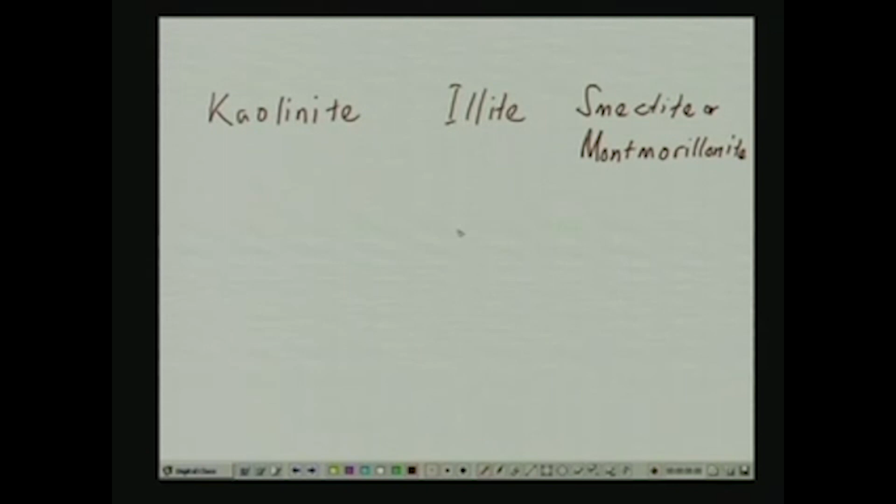If you consider this series here, we looked at some of the chemical processes involved in the tertiary weathering of these three most common clay minerals, and what we found is that under certain conditions smectite mineral actually converts into illite or kaolinite. So from that discussion it appeared that the weathering susceptibility of smectite is much higher in comparison with kaolinite and illite.

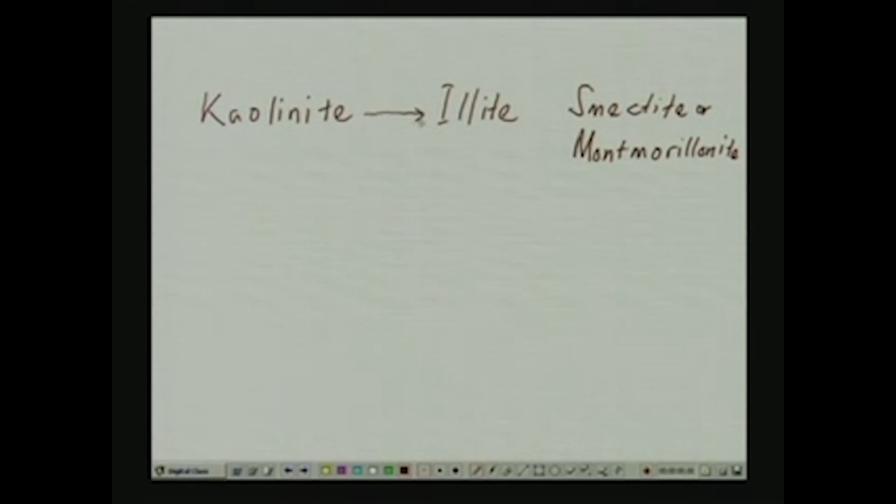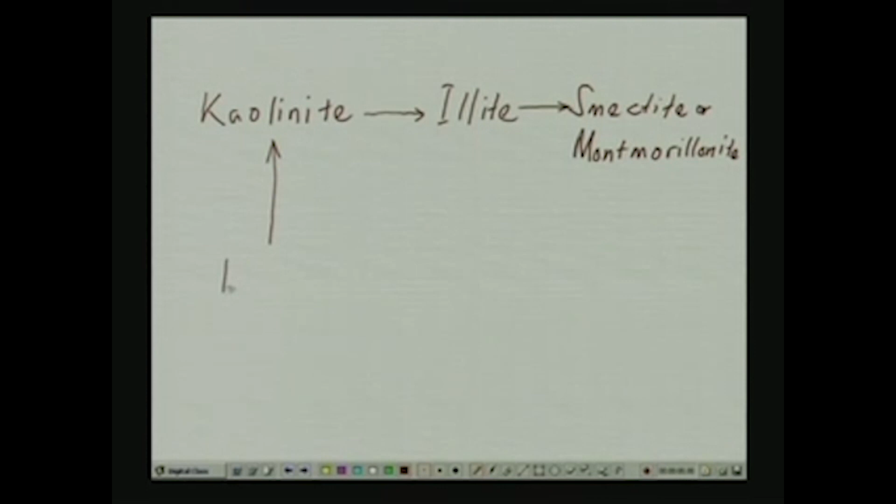In fact, kaolinite mineral is perhaps the most stable under ambient conditions, and that is followed by illite, and smectite is the least stable of all three most abundant clay minerals. So kaolinite is least susceptible to chemical weathering, whereas smectite or montmorillonite has got the highest susceptibility to chemical weathering.

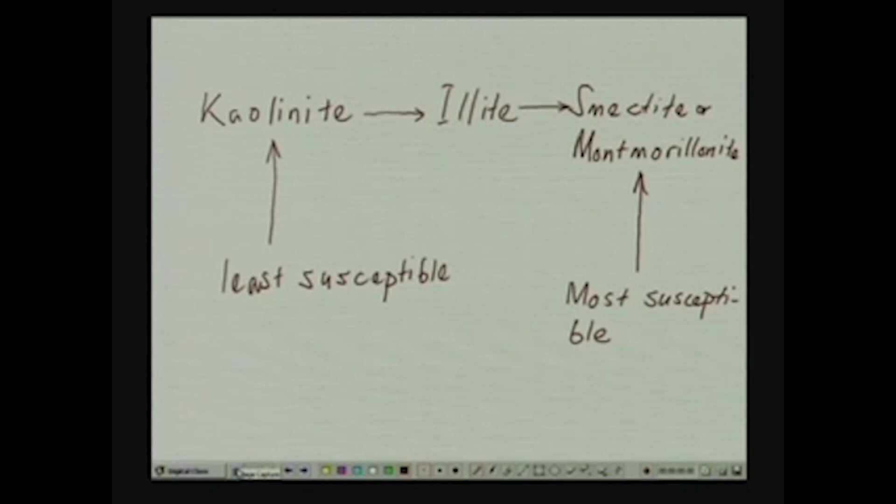Okay, so that actually takes care of the first question. Now the second question that I asked was which clay minerals form from chemical weathering of feldspar, and we discussed these things in the course of the last couple of presentations at length, particularly for orthoclase or the potassium feldspar.

What we indicated during those discussions is that under acidic conditions in presence of water, orthoclase mineral gets hydrolyzed, and that leads to the formation of kaolinite clay mineral, and that in turn, the kaolinite clay mineral can get leached and lead to the formation of gibbsite or bauxite ore.

Now a very similar chemical process is also there that leads to the weathering of sodium feldspar. So the sodium feldspar also gets converted into kaolinite mineral, and other weathering products such as release of alkali ions and generation of silicic acid. So that, in a nutshell, is the chemical weathering process of feldspar minerals.

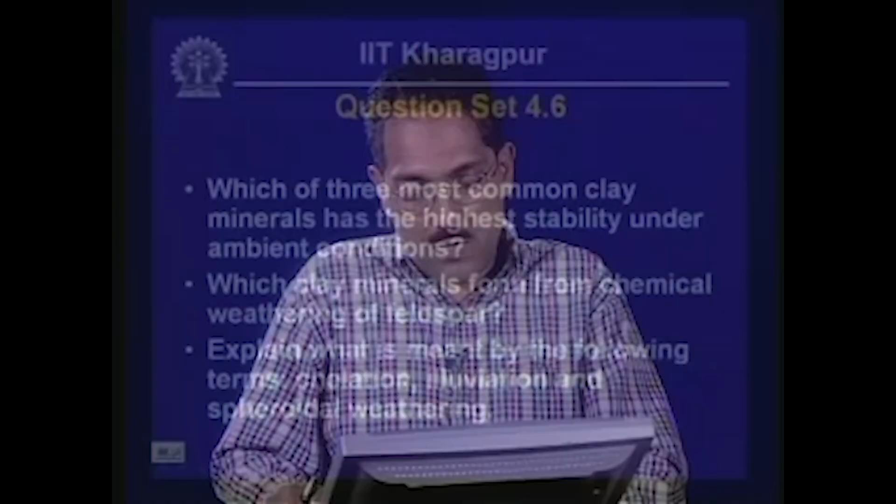This process has got importance not only in chemical weathering, but it is also commercially exploited in removal of several metal ions from different environments. Then the second term that I asked you to explain was illuviation, and to explain this, we have to look at a stratified deposit.

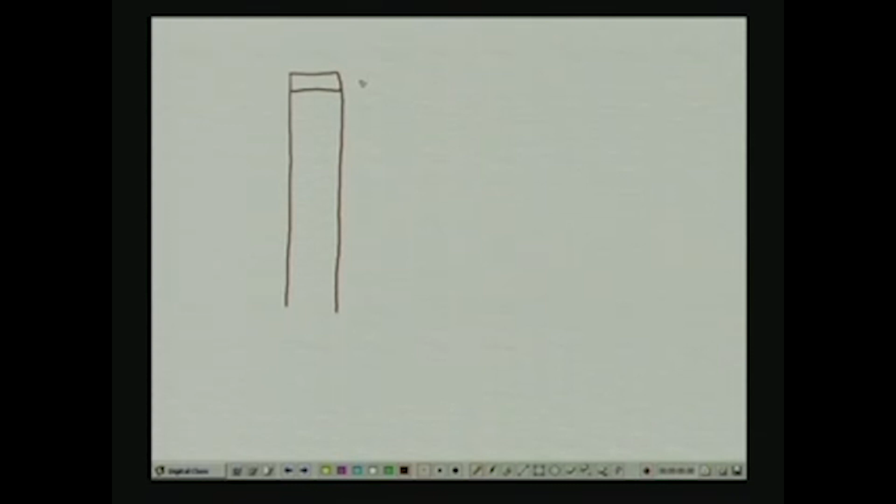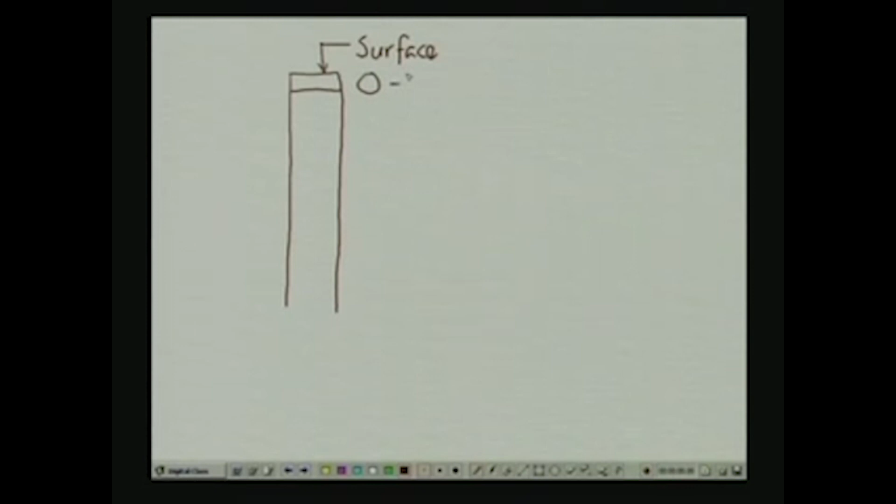Let's consider the residual soil deposit that we talked about in the previous lesson. In that particular stratified deposit you had an O horizon near the surface. So this one here is the surface, and then you have the O horizon that is full of organic materials, partly decomposed, such as partly decomposed leaves or animal remains and so on and so forth.

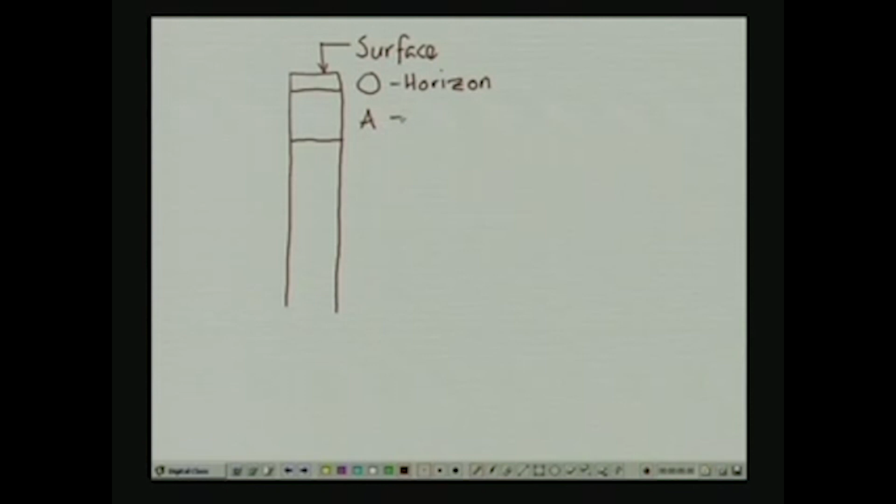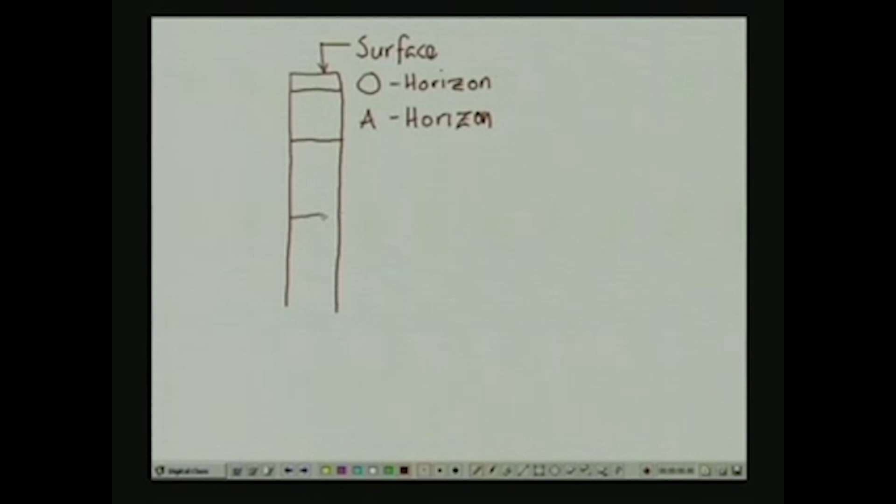And underneath the O horizon, typically we had the A horizon, and the A horizon, I stated, is rich in minerals, but it has got some organic compounds in it too. Underneath the A horizon there is a B horizon, and underneath the B horizon there is a C horizon, which includes partly decomposed bedrock or unweathered rock.

As indicated in the previous lesson, this kind of stratified deposit develops after chemical and physical weathering of the bedrock in situ, without any transportation process, over a very long time. If there is less time available for weathering, these distinct horizons do not develop. But here we are considering a mature stratified deposit of residual soil, like the one shown here.

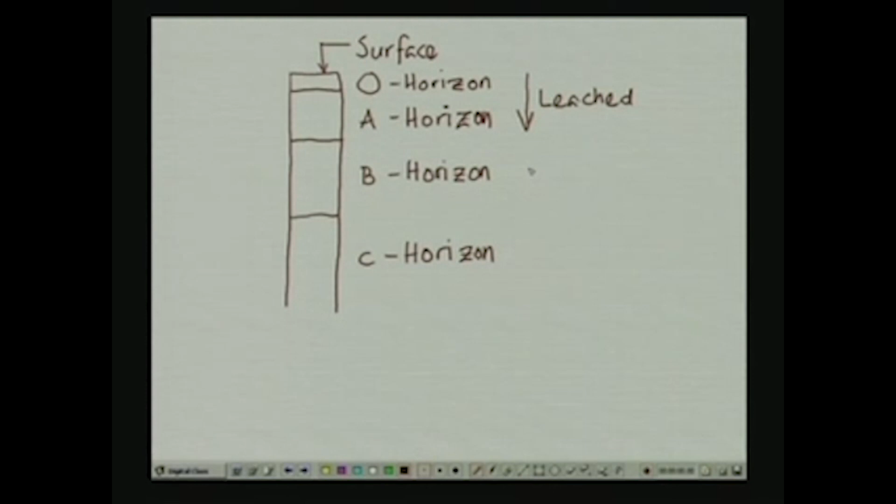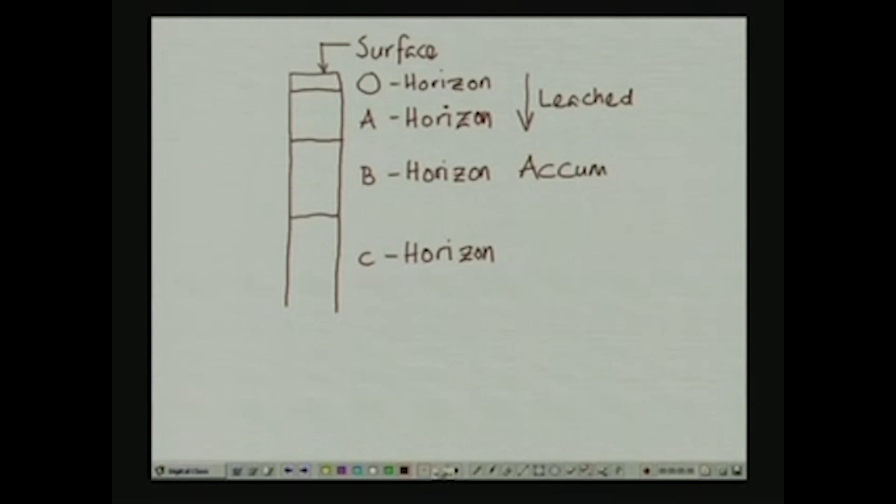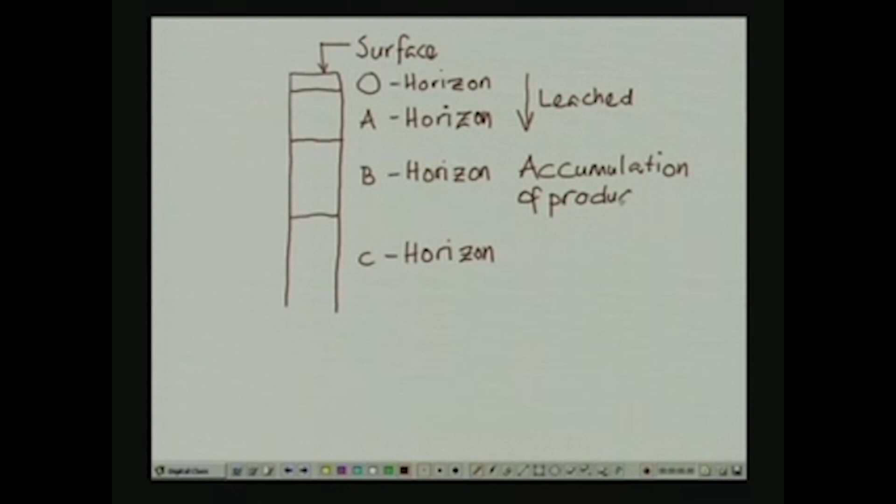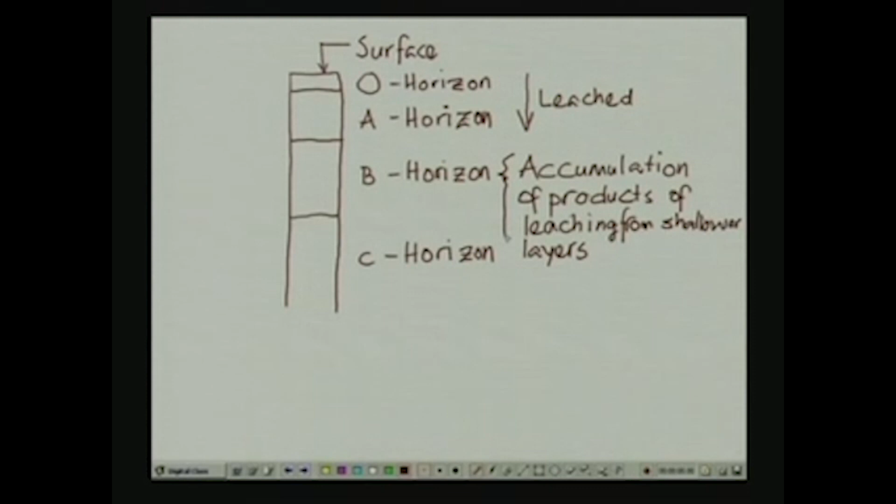In environments exposed to high levels of precipitation, such as rainfall and snowfall, chemicals from the O horizon and A horizon get leached out, and the products of leaching accumulate underneath within deeper layers. This accumulation of chemical products of leaching from shallower layers is typical of the B horizon, and this process gives rise to illuviating and eluviating horizons.

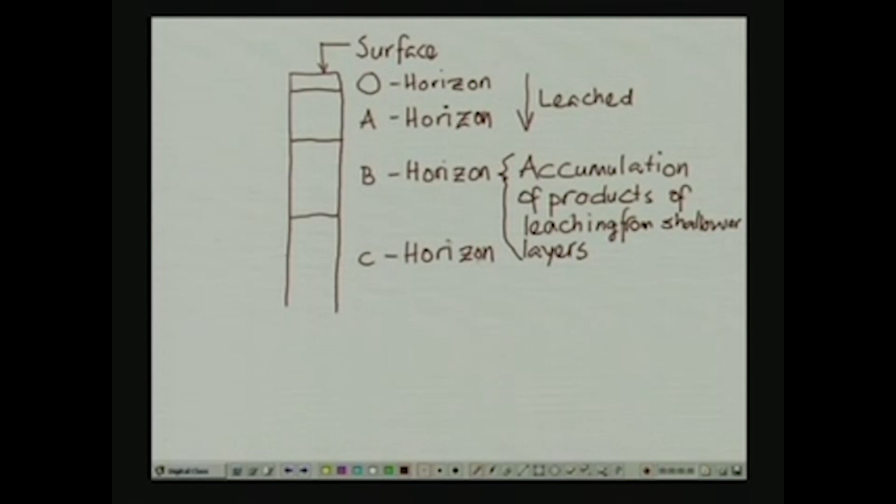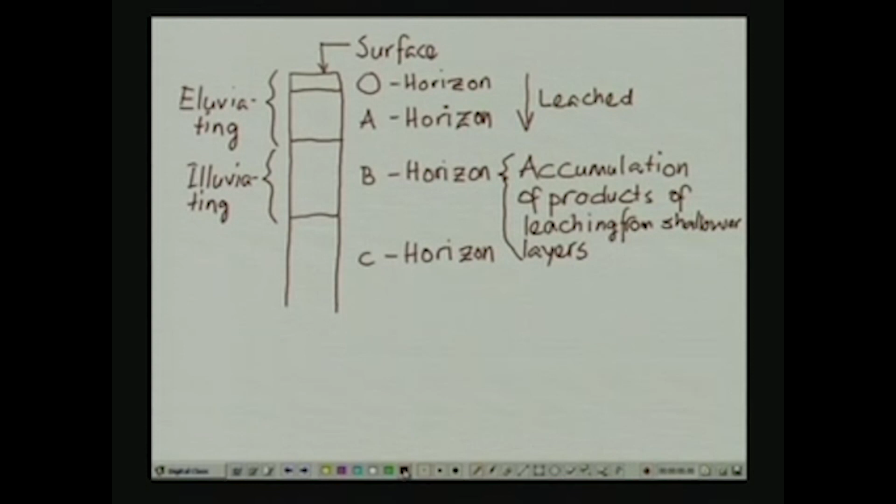These two are essentially eluviating horizons, meaning they are losing minerals, and this one here is an illuviating horizon, which accumulates products of chemical weathering from shallower layers. That explains the terms illuviation as well as eluviation, although the question did not ask for the explanation of eluviation.

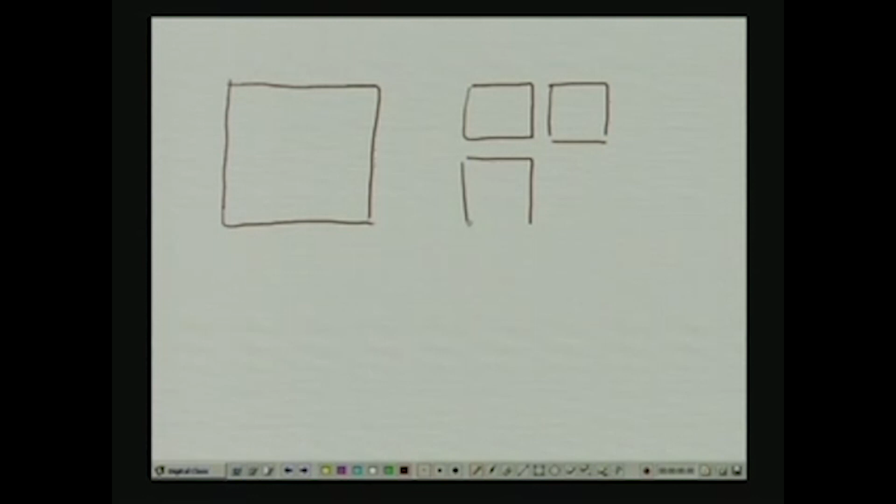Now the third question I asked was about spheroidal weathering. What I explained previously is that physical weathering involves breaking larger pieces of rock into smaller pieces such as these. Near the corners, the amount of surface area exposed to weathering agents is much larger in comparison with the volume it represents. As a result, weathering is much faster near these corners compared with flatter areas.

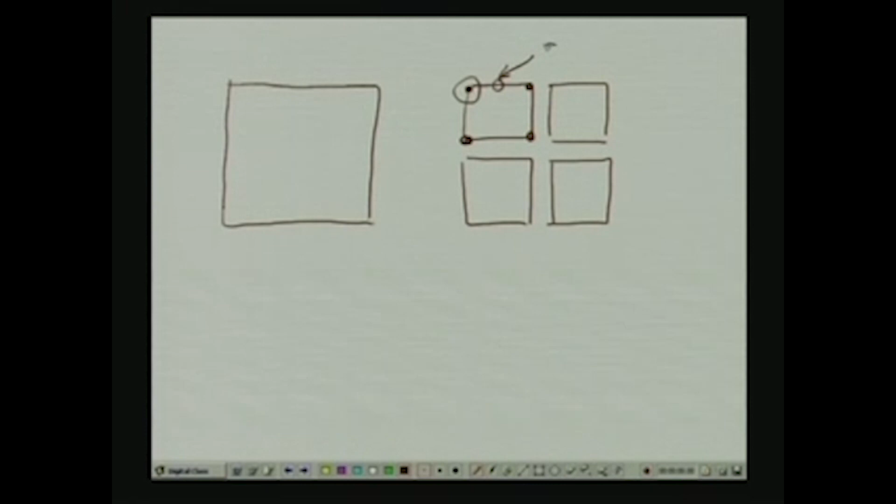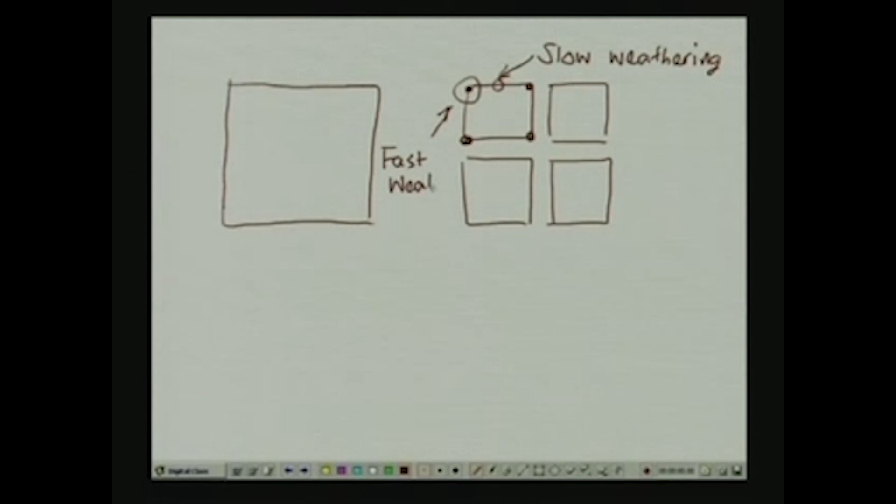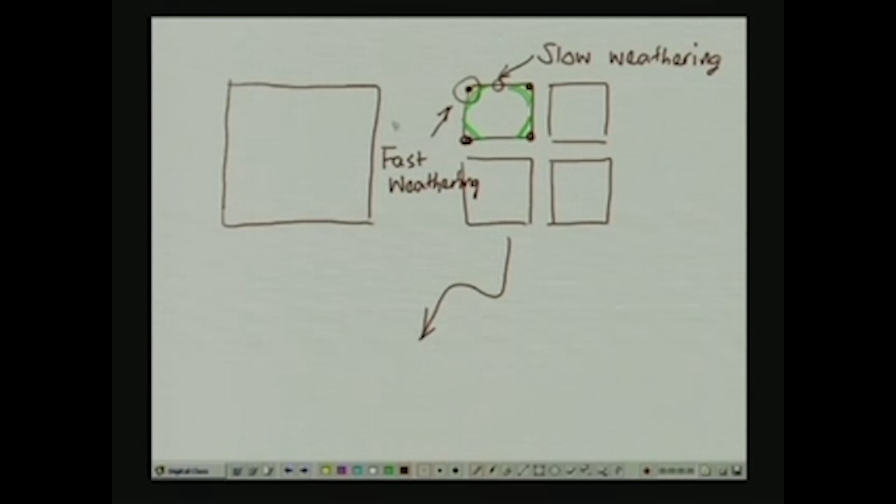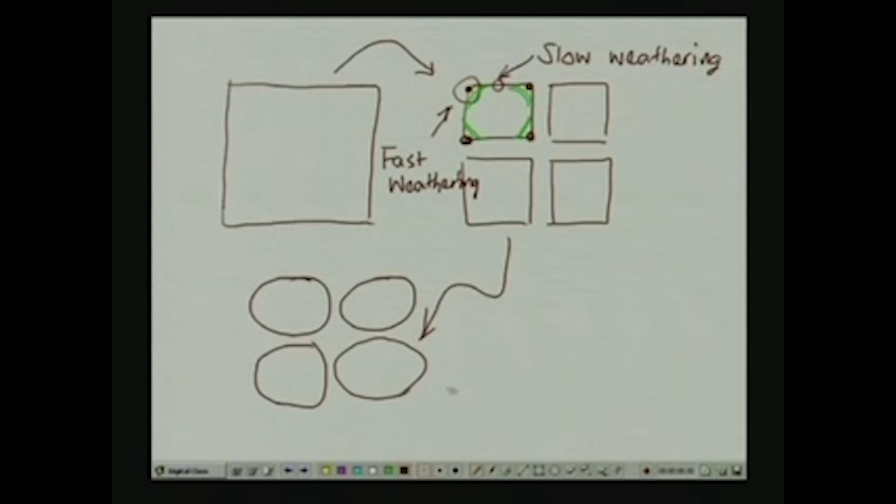So here you will have slow weathering typically, whereas near the corners you will have fast weathering, and this process leads to gradual rounding off of the corners of these pieces of rock. Finally, what you end up with is a situation where you are left with a bunch of rounded pieces of rock, and this particular type of weathering is called spheroidal weathering.

Okay, so that takes care of the question set that was given to you in the previous presentation.

Now we move on to the subject matter of this topic. What we want to learn in this lesson are the factors affecting sediment transport. We will be able to list the major erosional and depositional features that arise because of flowing water, wind, and ice, and we will see the grain size characteristics of the deposits that form during these transportation processes.

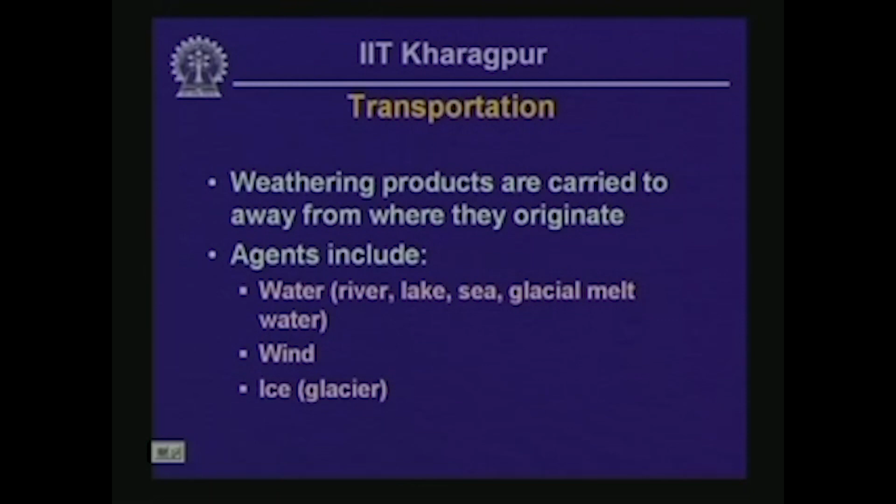First, the question that comes to mind is: what is meant by transportation? The products of physical and chemical weathering get transported away from the location where they were originally formed, and they get deposited at great distances from the location where they originated. This process is called transportation.

Transportation of sediments can be triggered by several different agents. The main ones are flowing water—which could be a flowing river, ocean waves, submarine currents, or meltwater streams from glaciers—as well as wind, or ice itself. These are the main agents that trigger the transportation process, and we will consider each one in some detail in this lesson.

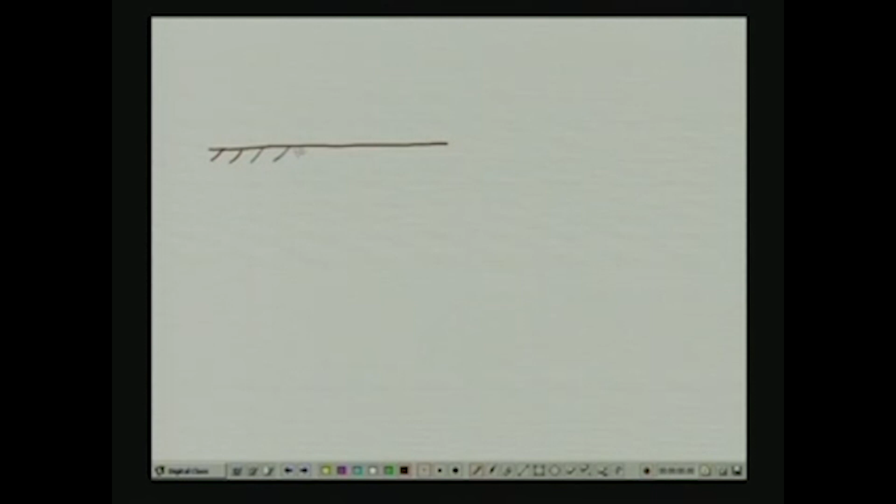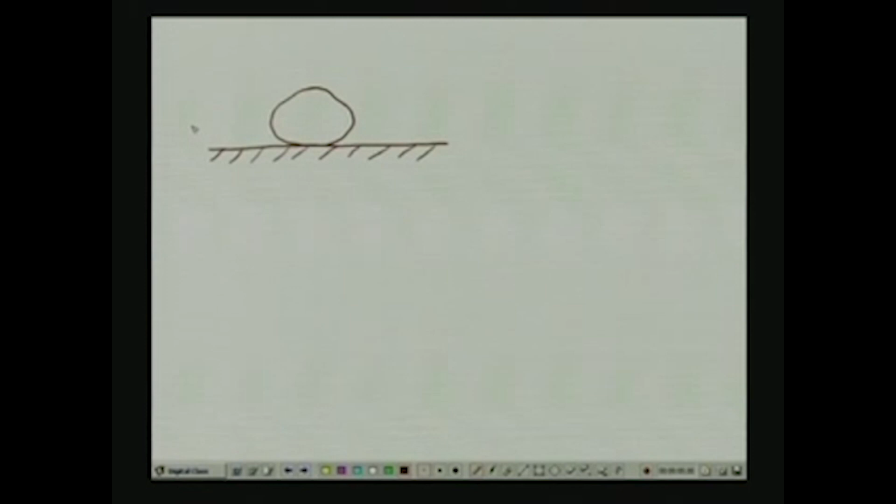To understand the transportation process, we need to understand the action of fluids which triggers sediment transport. The physical processes involved in fluid action include the development of lift and drag. Consider that near the surface of the earth you have pieces of rock or clasts, and water or wind flowing around these pieces, and the streamlines that develop in this process are of this type.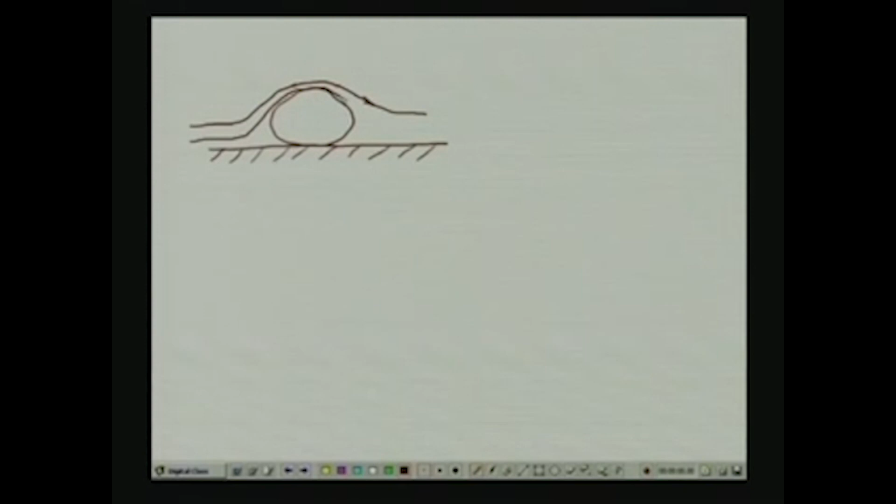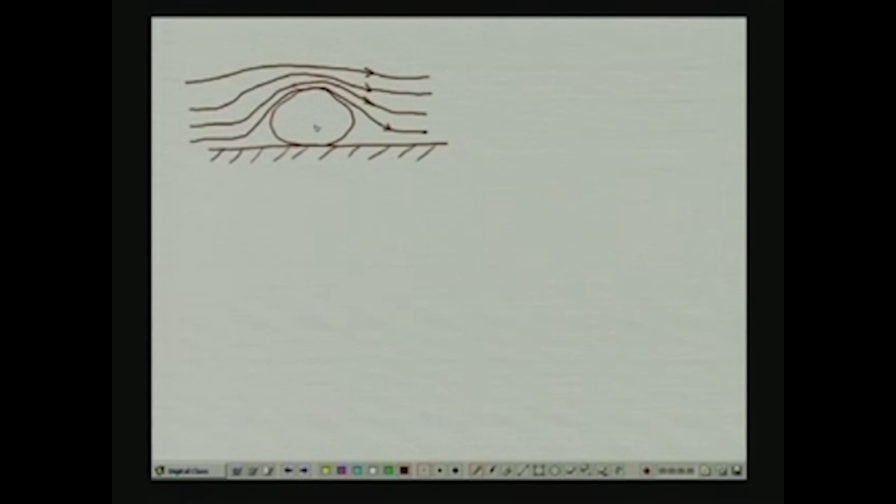What happens typically is that the streamlines get squeezed close together near the top of the clast that it is passing by. Because of that, a pressure drop develops near the top of this clast, and consequently the clast feels an upward force—this type of force is called lift.

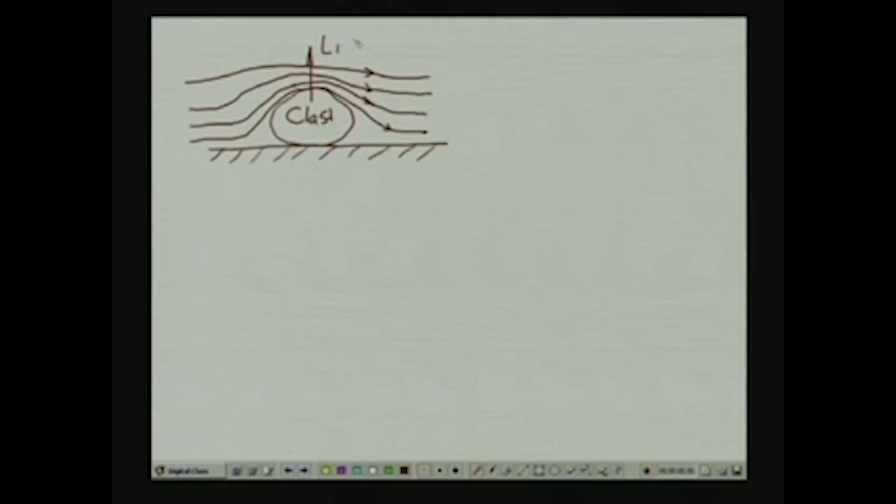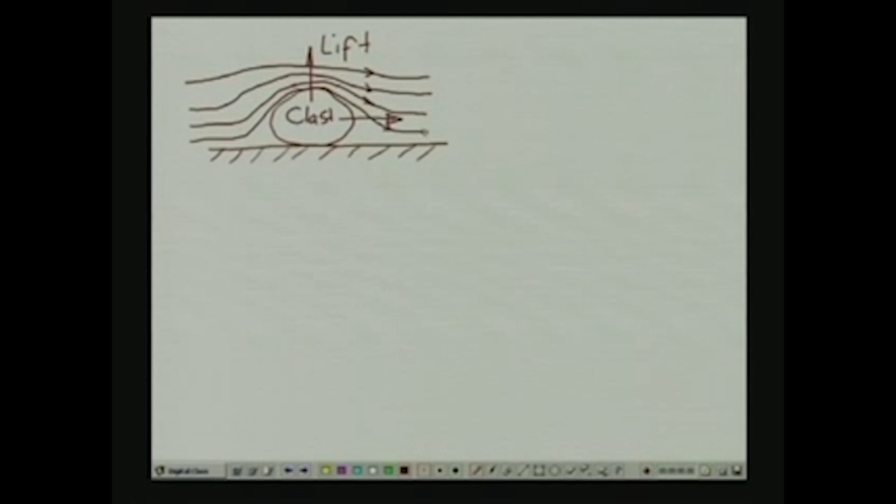This is actually exactly the same kind of process which gives rise to the lift above airfoils or the wings of an aircraft. It is exactly the same kind of process, and there is also a pressure drop near the front of this type of configuration of this flow regime, and as a result the clast also feels a force in the forward direction, and that type of force is called drag.

So the clast gets dragged in the direction of flow. In this case the direction of flow is oriented like this, so this is our flow direction. The clast is going to feel a drag along the direction of the flow, and also it is going to feel a lift.

A lift above, perpendicular lift in the vertical direction, because of the close packing of the streamlines near the top of the clast.

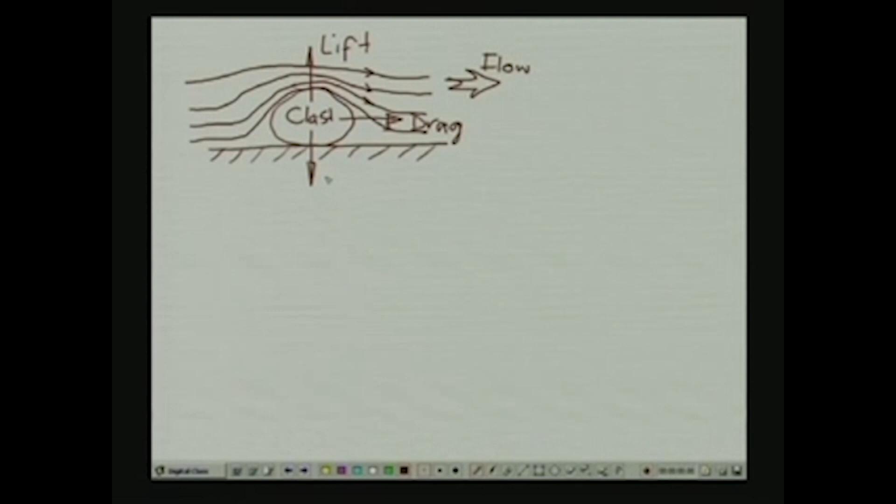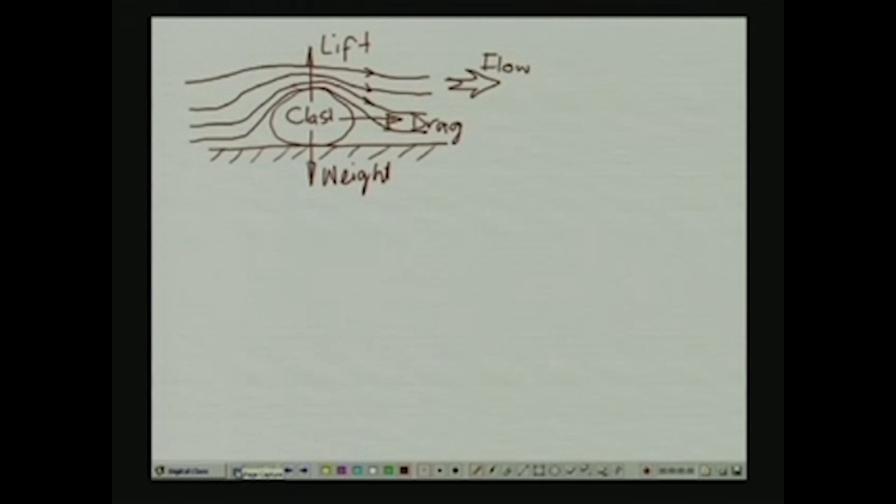In addition to that, the clast is also going to have its own weight. So the weight of the clast is going to be counteracted by lift, and if lift becomes larger than the weight, the particle is going to become entrapped or entrained within the fluid flow.

The first one, on the left, is called the Shields parameter, in which you have got a quantity called tau naught in the numerator, and this particular quantity depends on the characteristics of packing, in other words how closely packed are individual grains near the location where the transportation process is being triggered.

It also depends, the quantity tau naught, on the geometry of individual grains, such as particle size diameter.

In the denominator, what you see is a quantity called gamma, and gamma is really the unit weight of the particles being transported, that the fluid action is trying to transport. Subscripted S, subscripted G subscript S, is the specific gravity. So gamma is the unit weight, and this one is the specific gravity of the solid particles.

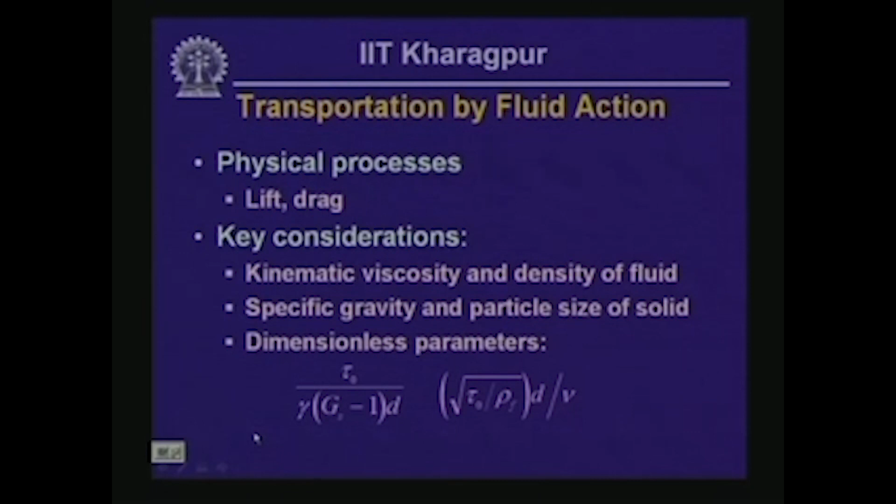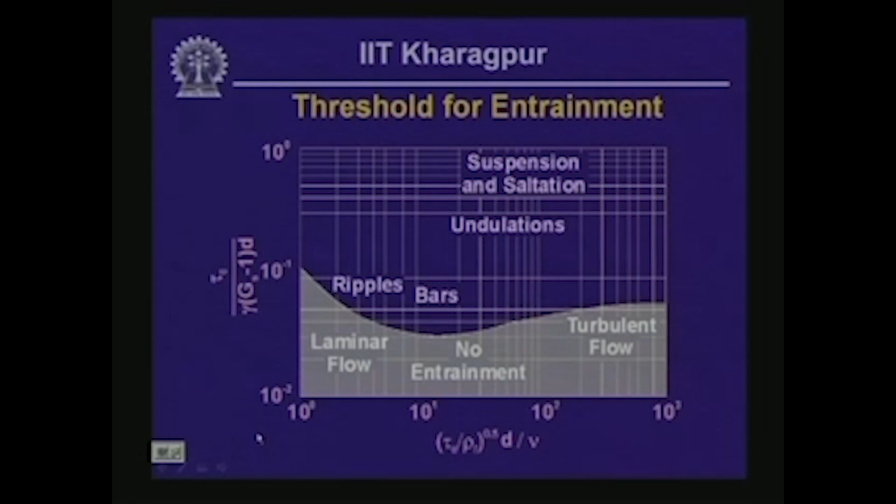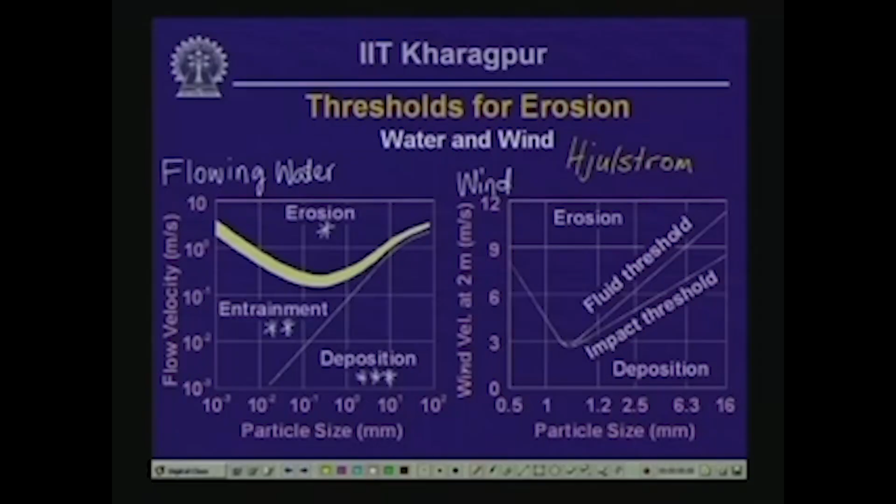So first we consider water action, the sediment transport triggered by water flow, and one of the physical processes involved in this case is river flow.

Erosional activity because of river flow is triggered, as indicated previously, by hydraulic action, which is essentially lift and drag. It could also be due to abrasion: particles entrained in the water flow can rub against the bed forms, dislodging even more particles. The third process involved is cavitation.

The cavitation process arises when the water flow becomes very turbulent, and because of the turbulence, bubbles form within the flowing mass. These bubbles sometimes implode, and the implosion leads to the development of jets of water that impinge onto the rock surface. In very high velocity environments these jets are sometimes powerful enough to trigger more erosion, and this type of activity is seen near the bottom of a high waterfall.

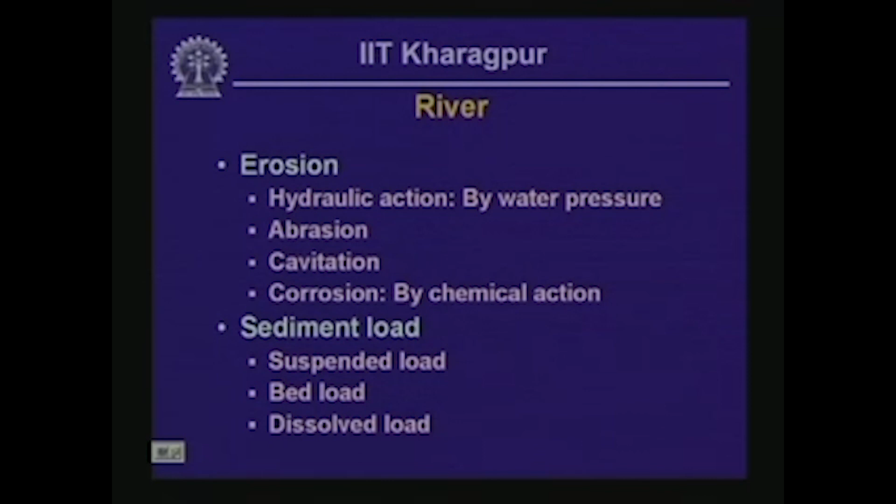Now sediment load carried by a river could be suspended load, bed load, or dissolved load. Suspended load consists of particles entrained within the flowing water itself. Bed load consists of particles being dragged along the bed forms, along the river bed. Dissolved load consists of chemicals being carried by water flow in solution. Suspended load by far is the largest proportion of all three, constituting typically about 70% of the mineral load carried by river flow.

Now we look at the erosional activity of wind. Wind takes solid particles, entrains them by three processes essentially. The first one is deflation. This is because of localized drop of pressure, and because of that a portion of the surface is simply blown away by the wind that is blowing over.

Then the second one we consider is abrasion. It is essentially the same as the rubbing action we talked about when we looked at erosional activity of water near the river bed. Then the third one in this case is attrition. The particles entrained in wind, of high velocity, go and impinge against exposed rock surfaces, and that leads to dislodgement of clasts of rock from the surface, wear and tear of the surface, and this process is called attrition.

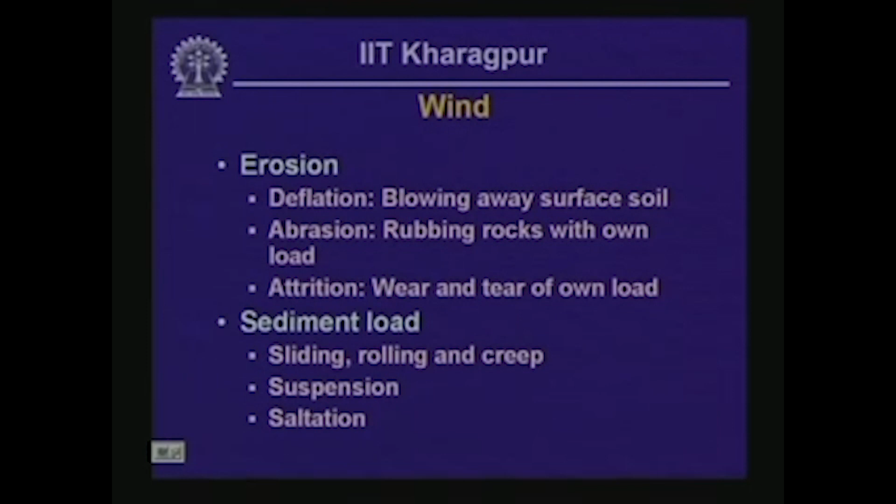Now the second aspect here is the sediment load. As it is quite similar conceptually to that involving river flow, there will be a bunch of particles that are going to slide, roll or creep near the bottom, near the interface of the bedrock and the wind flowing over it, or it could be taken into suspension within the volume of flowing wind, or there could be saltation, which is somewhat intermediate between the particles carried as bed load and those in permanent suspension.

So these particles are really taken into suspension temporarily, and then the flow velocity, or the wind velocity, is not enough to sustain them within suspension, and as a result they get deposited within a little bit of distance downwind, and this process is called saltation.

Now the transport mechanisms because of ocean currents are essentially very similar to the transport mechanisms considered concerning river flow, but in this case there is an essential difference: the flow velocities typically are much smaller in comparison with subaerial water flow like river flow. Under ocean currents, velocities are typically much smaller, but the physical details of the processes are very similar.

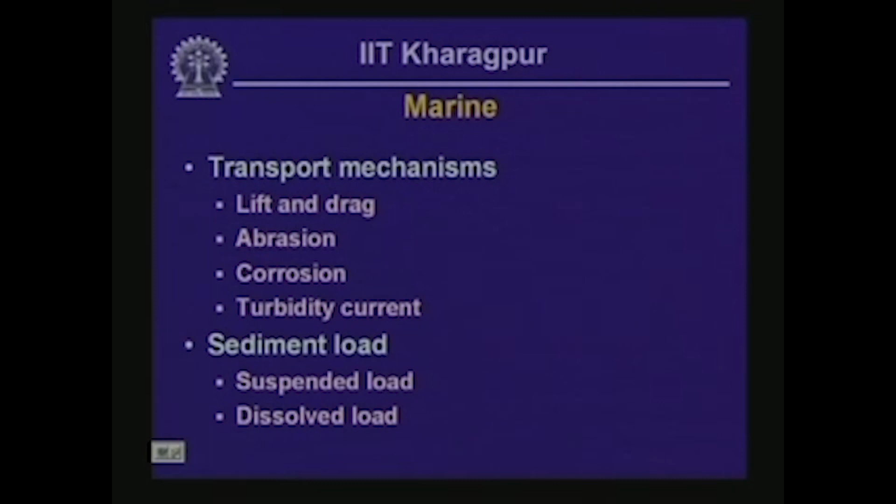Transportation, erosion and sedimentation processes associated with moving ice or glaciers. First we consider the physical processes involved in glacier-related erosion. The processes involved include plucking, where pieces of rock get entrapped in the ice flowing on top of the bedrock, and there could be abrasion as well. Abrasion, like earlier, is essentially the rubbing of ice and the load the ice is carrying near the interface of bedrock, and this process leads to the grooving and polishing of exposed bedrock surfaces exposed to glacier movement. We are going to see the landforms that arise because of that.

Now the sediment loads carried by glacier are of three types: supraglacial, englacial or subglacial. Supraglacial sediments involve those carried on top of the moving ice. Englacial debris includes those clasts entrapped within the flow of ice by the flow lines, stream lines. Or it could be subglacial. Subglacial sediments are carried and are conceptually very similar to the bed loads carried by river flow and wind, which we already discussed.

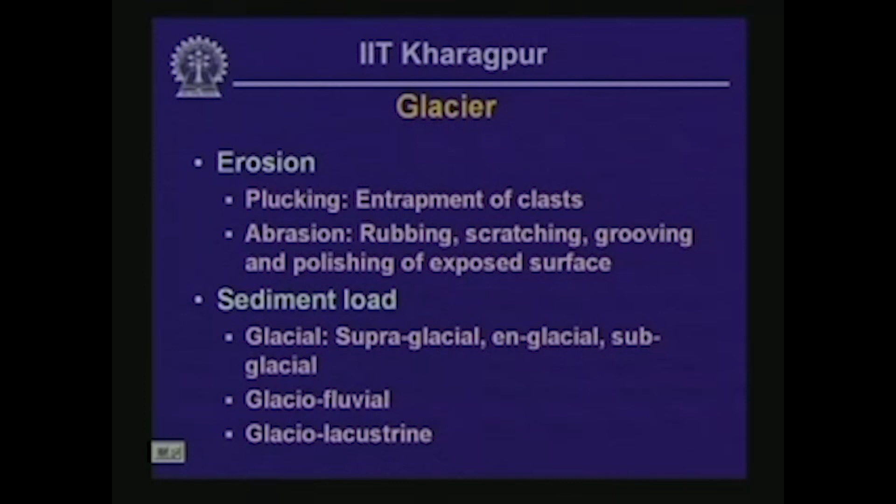Okay, now in order to recapitulate the processes involved in transportation, we look at a couple of sketches. The one on the bottom left shows the transportation processes involved with the flow of water, and as indicated before, the sediment loads could be either suspended load or bed load, or sediments being transported because of saltation.

The cartoon on top right shows the transportation processes that are involved because of wind. Here you again have suspended load, then bed loads that are transported from one location to the other by sliding, rolling or creep, or by saltation, just like in flowing water.

But here you notice an essential difference: a secondary movement of particles is triggered by bouncing. When particles that are airborne temporarily because of saltation land at some distance downwind, they can collide with particles that are not initially mobile, and these particles can become airborne because of the collision process. This kind of secondary movement is not normally observed in water flow transportation, because the impact of landing particles is cushioned by buoyancy effects due to the presence of water.

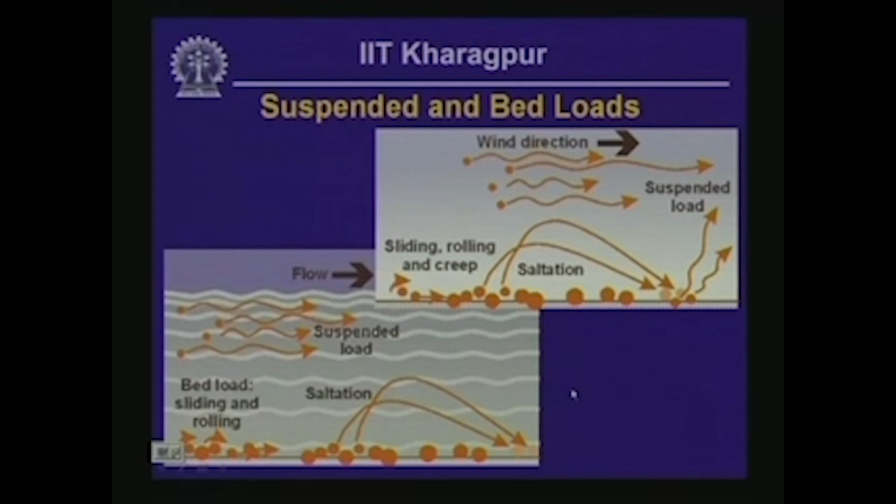Now we try to look at a number of features that arise because of fluvial erosion. Some of these features have already been discussed when we were looking at landforms in one of the earlier lessons.

The first type of landform that is important here are gorges and canyons. This type of landform arises because of sudden increase in flow velocity, or sudden uplift of the river bed because of tectonic activity or other geologic processes, which can lead to undercutting of the valley bottom, and as a result gorges and canyons develop.

Then there are other landforms we have already discussed involving escarpments and waterfalls. Here the river undercuts soft rock stratum preferentially compared to strata that are more resistant to erosional activities, and as a result steep bluffs form. If such a bluff forms along the river flow, that leads to the development of a waterfall, which we discussed in greater detail in one of the previous lessons.

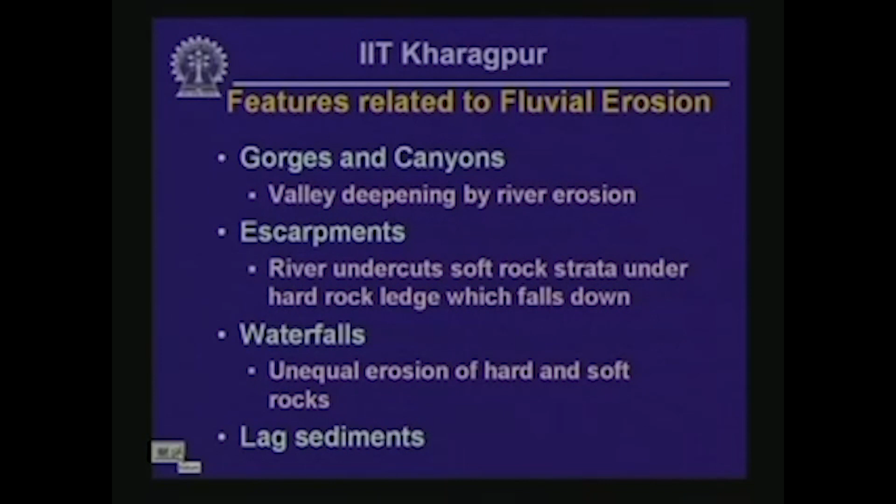Another feature associated with fluvial erosion is lag sediment. These are essentially coarse grained sediments that cannot be transported by the flowing water, and are left behind. This process leads to the development of coarse grained deposits called lag deposits. They could sometimes even include sands on the finer side, but typically they include gravel sized particles or coarser grained particles.

Then we look at some important features related to wind erosion. We have discussed one of them a few minutes back, called surface blowout. This is essentially a reasonably large area, a few meters across maybe, that is sucked out from the surface because of the low pressure that locally develops during blowing of wind, and that process leads to the development of surface blowout.

The second important feature is desert pavement. It is very similar to the lag sediment feature we discussed just a few minutes back, and includes soil particles that cannot be transported by wind action. From within these soil particles, finer grained particles are blown away by wind, leaving the coarser grained gravel size or sand size particles, and these lead to the development of desert pavement.

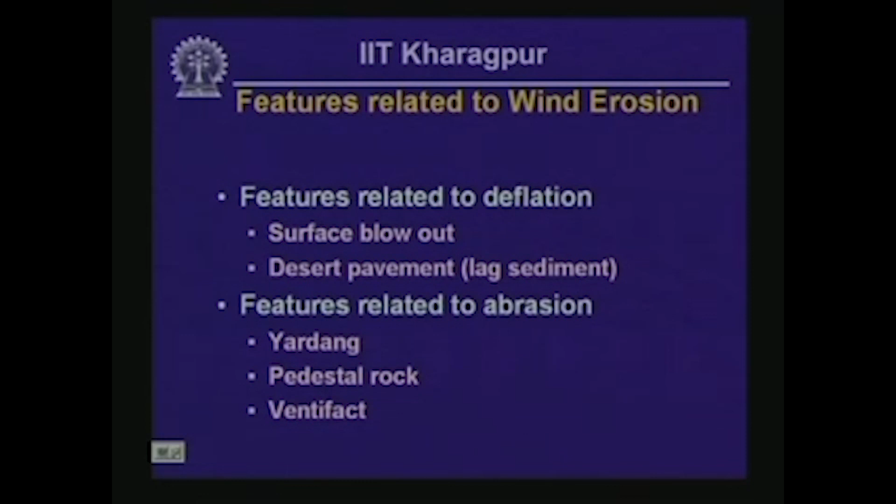The third important one arising because of abrasion activity of wind is ventifact. This particular landform is essentially a polished surface that arises when wind carrying a lot of debris, such as sand sized particles, keeps impinging on exposed rock surface, leading to development of a polish on that surface. So that is called ventifact.

Now features that relate to wave action. Here what we typically have are sea cliffs, which are steep bluffs that face the ocean. Then there could be headlands or bays, which involve eroding away of soft rocks, leaving behind some projections of harder layers, called headlands. Or there could be wave terraces, which are essentially shallow flat shelves cut by waves.

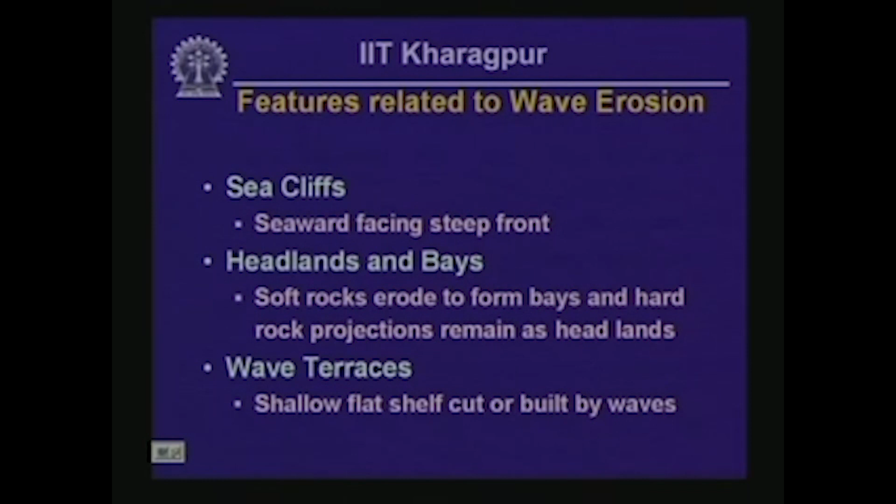Then some of the features related to glacial erosion, striations, scratching and grooving of rock, which we have already discussed. Then there could be crag and tail. These are essentially hard rocks that protrude and protect soft rock.

And roche moutonnée. These are basically asymmetric hills, asymmetric humps of bedrock with one side steeper, the down-glacier slope much steeper compared to the up-glacier slope, and the down-glacial slope is quite rough because of the plucking activity of the ice movement, whereas the up-glacial gentle slope is quite smooth because of the polish grinding effected by ice flow.

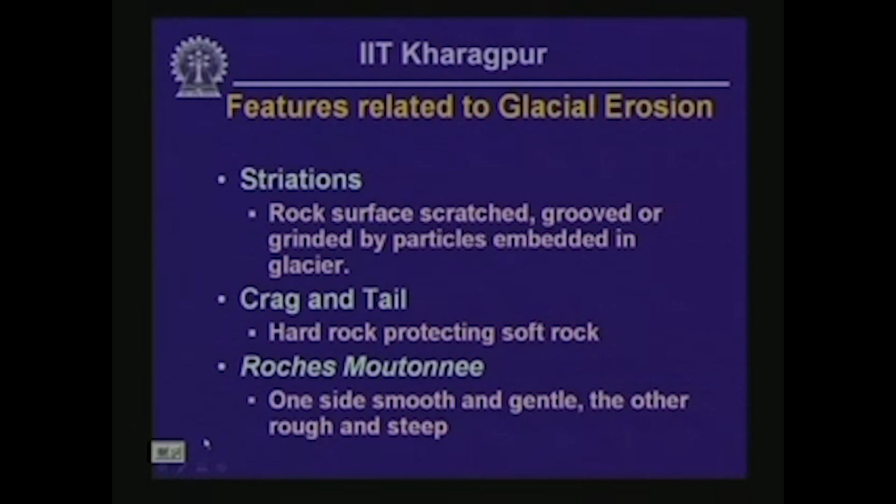And some of the wind-blown or aeolian deposits, dunes that we already know. Dunes could be of different geometry, different types of footprints, and they can be crescentic or they can be straight. Then there is loess deposits. These are essentially silt and clay grade particles that are dumped by wind.

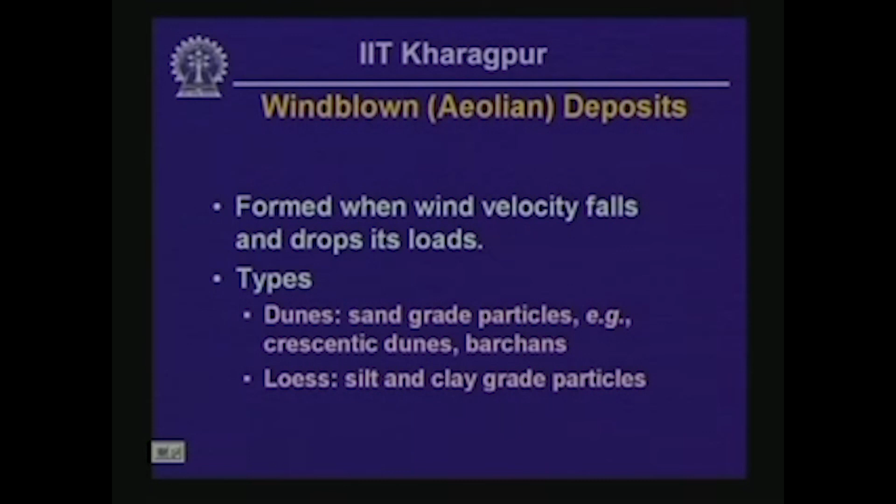Some of the fluvial deposits, alluvial fans and cones. These are when mountain streams enter a flat area and there is a sudden change in velocity involved, and that leads to the dumping of coarse as well as fine grained deposits.

Floodplain deposits, these are essentially overbank deposits, low velocity regime deposits, so they are rich in fine grained sediments, sorted because the sediments that are deposited near the river bank are much larger in size, whereas those deposited farther away, they are typically of finer grains.

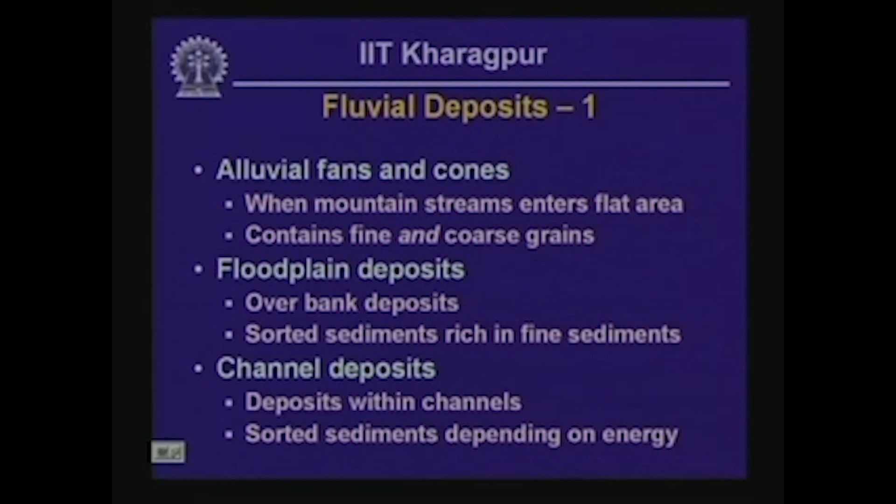Then channel deposits, these are deposits that form within the channel. They are again sorted, but they are relatively coarser grained in comparison with floodplain deposits because of the larger velocity regime in which they get deposited.

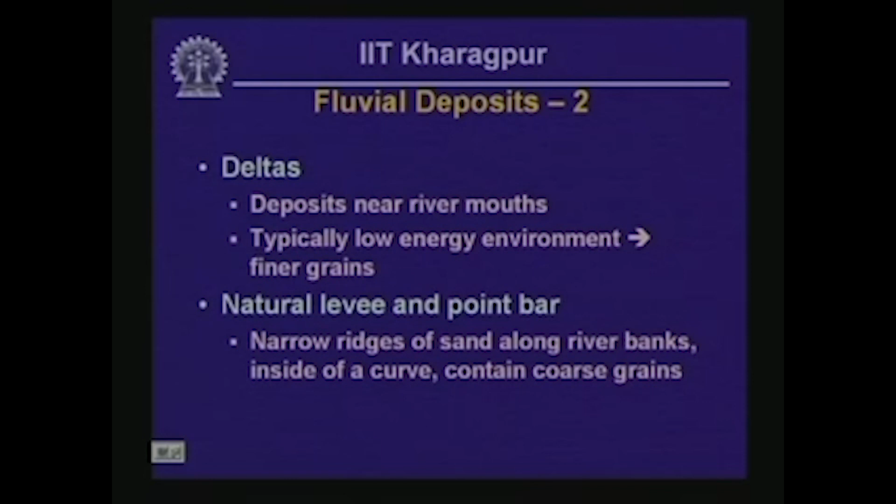Then there are deltas, they are again deposits near river mouths, low velocity regime, so the sediments are typically rich in finer grain sizes. And then there are natural levees and point bars, they are narrow ridges of sand along the river bank and typically inside of a curve, and they contain a lot of coarser grain deposits because of higher velocity of the flow involved.

They could include turbidites, and turbidites are the deposits laid by turbidity currents. Because of the high energy involved in this case, they could be of mixed grain size. And there could be pelagic mud, these are deposited in very low energy environment, so they are very fine grained, they include very fine grained particles.

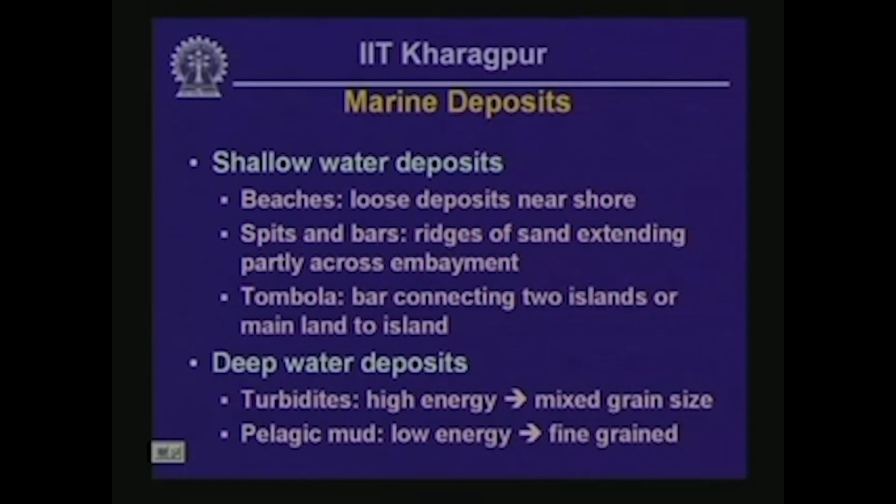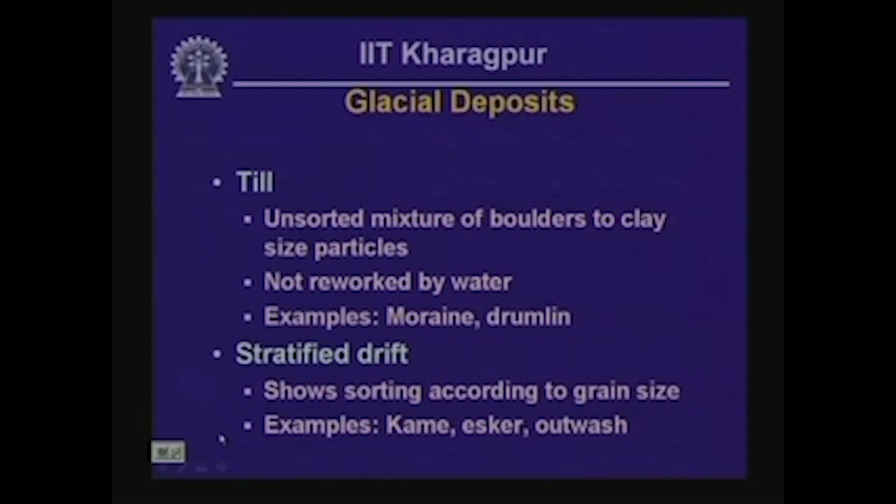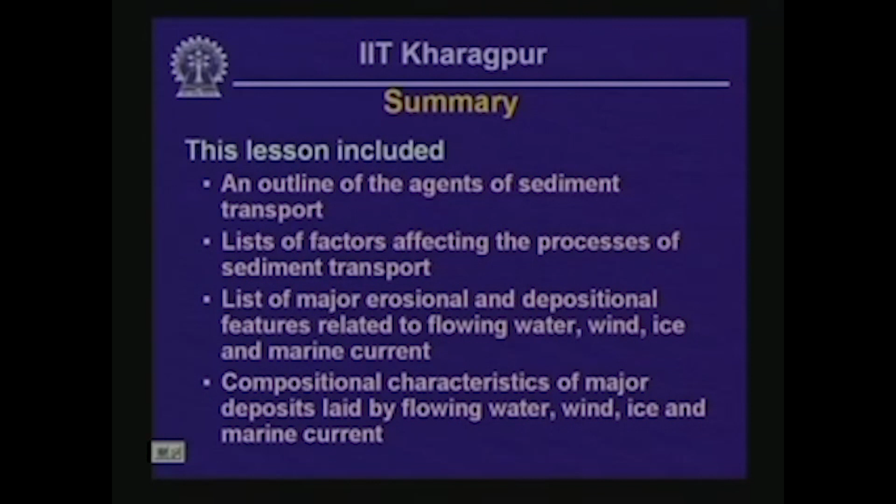To summarize this lesson, we looked at an outline of the agents of sediments, sediment transport processes, a list of all the factors that affect these processes, and some major erosional and depositional landforms, including the compositional characteristics of the sediments that are deposited in these processes.